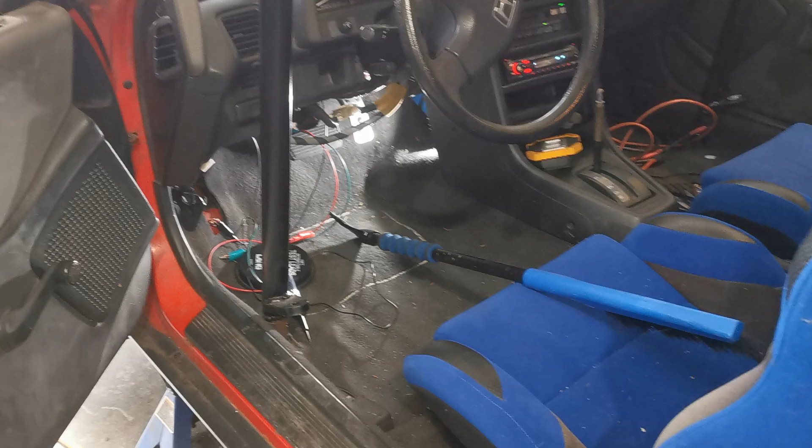I will post a quick video. I'm in the process of getting the Zombieverter VCU to run.

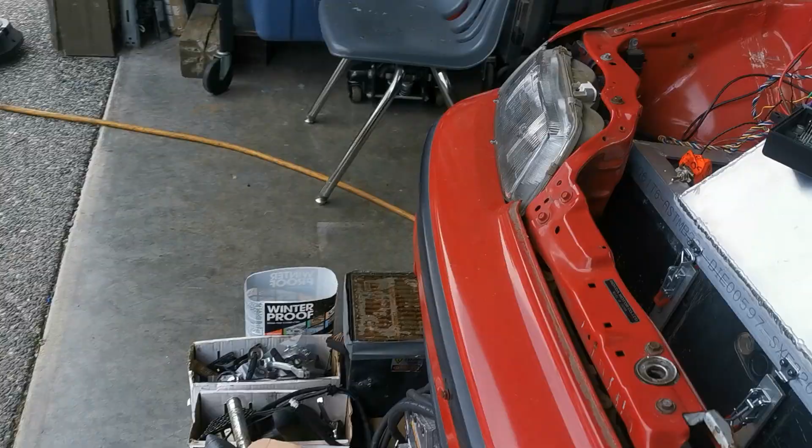Axiom, and yes, I have a big mess of wires. I'm just trying to sort out how everything's gonna work. Oh, I got some heat in there too.

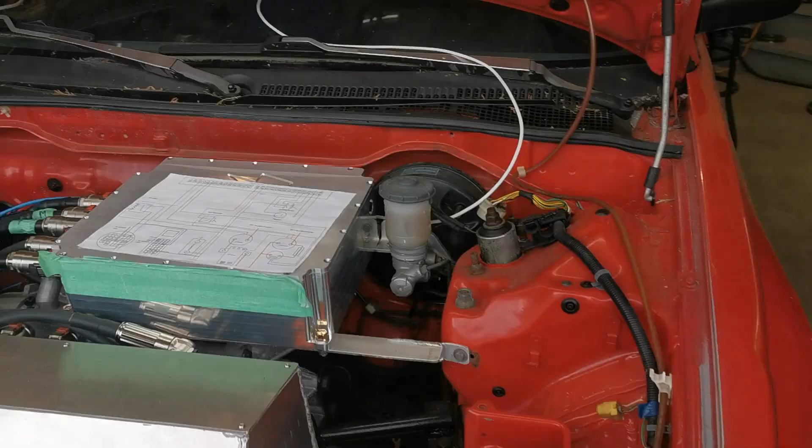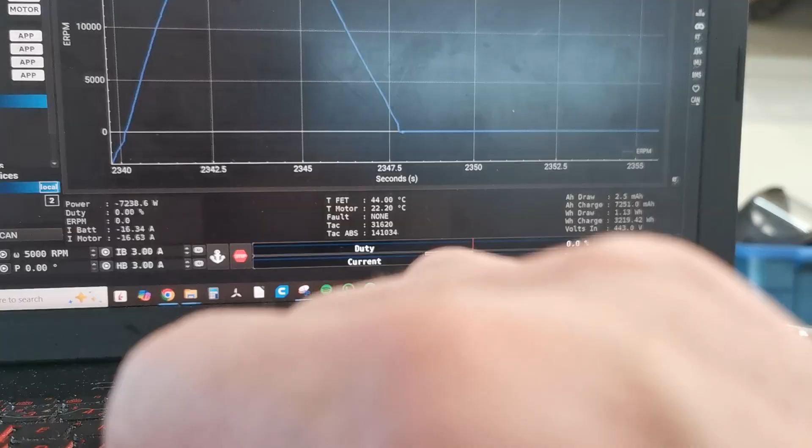I can hear the PWM in Axiom right now. For whatever reason, it wants to try and hold the motor with IGBTs, and I gotta remember what the trick is. There's a setting in VESC, I think, to stop that. If we go here, come on. I can't remember, but there is a setting in here somewhere. I think it helps with that part.

But anyways, I need to figure that out. But anyways, try and get back on track here.

It's just spinning the open diff right now. It's not actually turning the motor. The motor's kind of locked by the Axiom PWM.

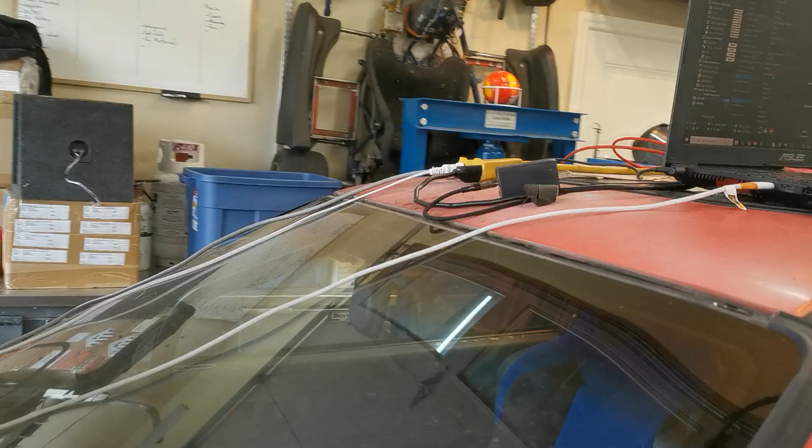So I've got some stuff working. I've got some communication with it. I've made big progress actually this week, and I'm super excited about that. I've got all the way to where I have, there we are, the web interface working, with an experimental version that runs basically VESC controllers to work with Axiom.

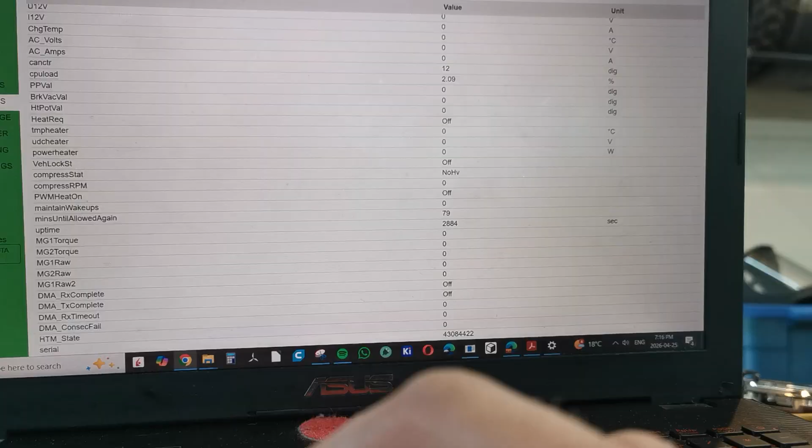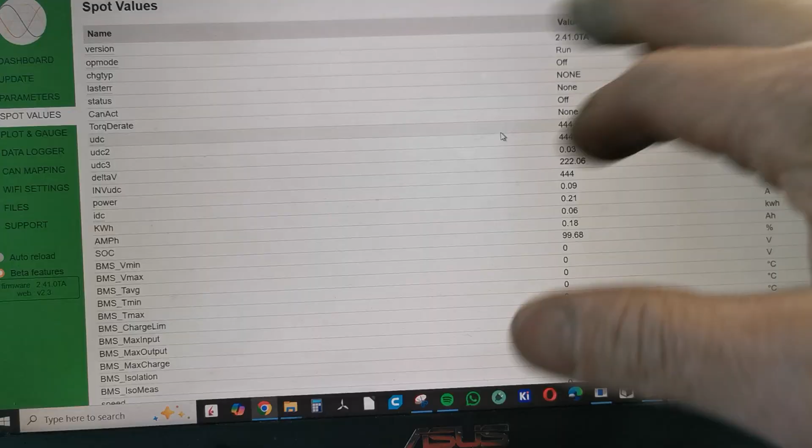I don't have everything set up, but I have a bunch of stuff. I basically have an ISA shunt, Axiom communicating, so it's telling like even the inverter voltage. There's a decent amount of stuff happening, so that's exciting.

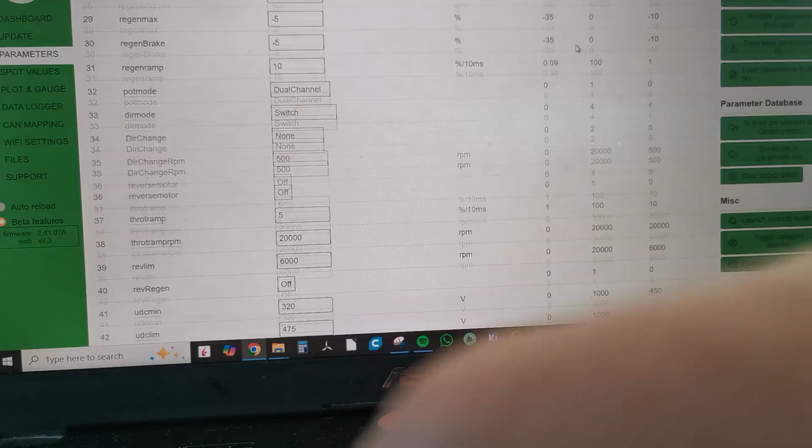There's a lot of parameters we can set in here. It's really good. I've set got pre-charge controlled by the Zombie VCU, doing really good. And I even set up the Wi-Fi to log into my house Wi-Fi. So now I'm actually still logged into Wi-Fi on my computer, but I can access this through the inverter local.

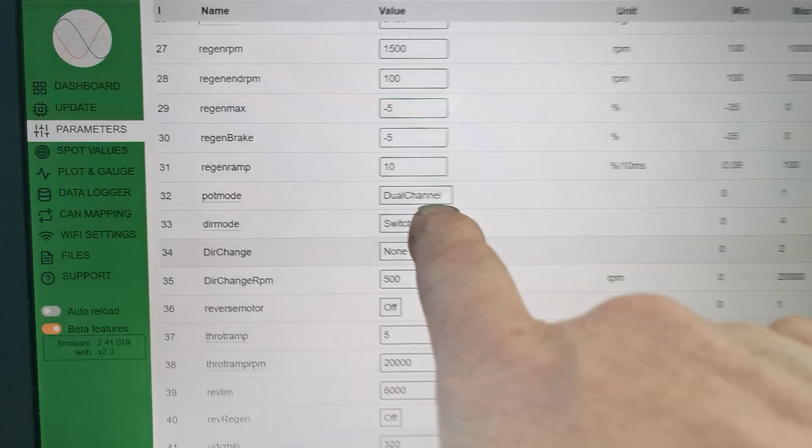Which is pretty handy. I've got the throttle, dual throttle signals. So there's 2 pots in the parameters here. Let's see, pot 1 and pot 2. So basically got dual channel pot mode right there, and pot values, we can look at them. They're usually just over 400 and something digits, so they're both working.

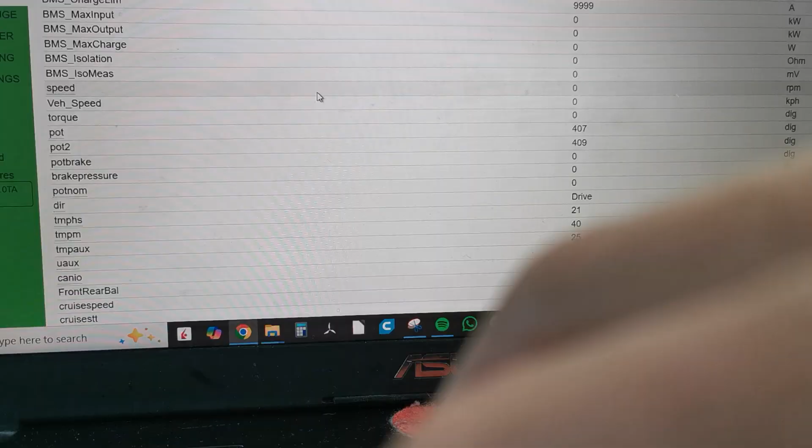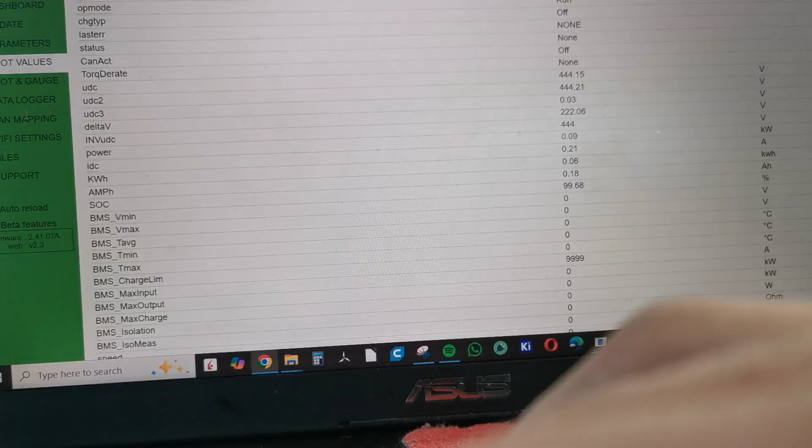Lots of stuff going on, so this is exciting. I'm still sorting some things out. So one of the problems I have right now, and I'm just using a snow brush to try the throttle. I have 2 things going on. So just a little bit of throttle, it turns the wheels, and then if I let go, it revs up.

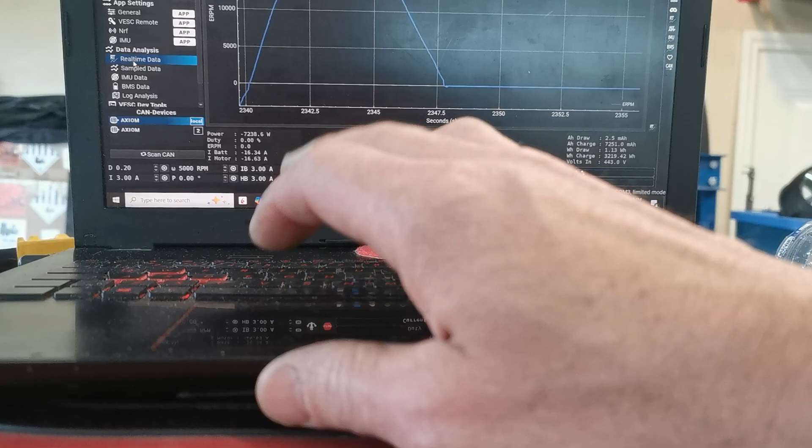On its own in reverse sometimes. But then sometimes it stops and goes forward again. So I don't know what the cause of that is yet, if it's a setting here in Axiom, or if it's a setting in the code or whatever. But it could be a lot of things, so we'll see if we can get that to happening.

And sometimes it goes a bit, so there, I'm not even touching the throttle, it's revving up on its own and forward, and then sometimes it'll stop and go reverse. I'm not touching the throttle, so this is kind of scary stuff. But I have the power turned down, so hopefully it stops eventually. If it doesn't, I'll shut the key off, but I'm trying to avoid that.

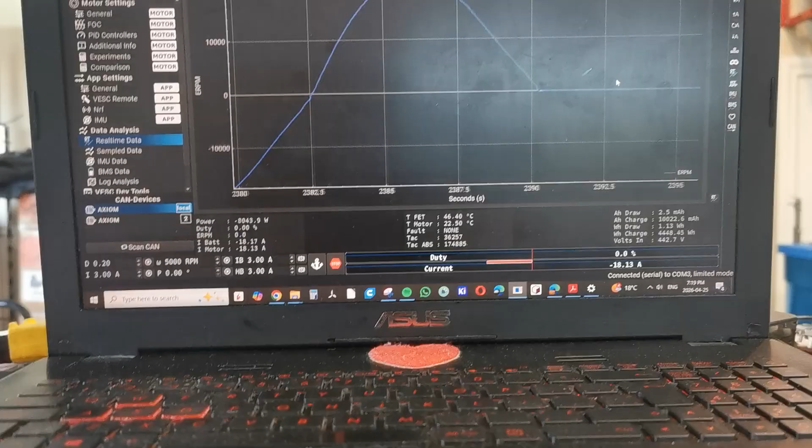Yeah, there, it stopped eventually. So you can see sometimes it does that back and forth. And yeah, like I said, I got the throttle power limit set down quite a bit and everything. It's up on jack stands, make sure there's nothing under the wheels.

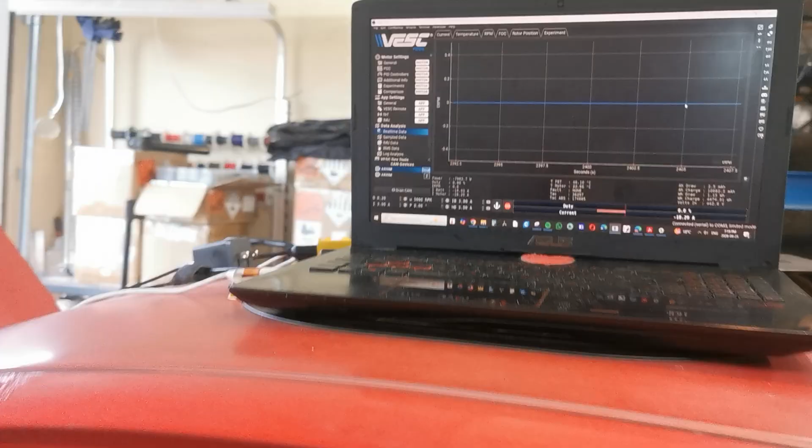I'm also not currently communicating from the front Axiom to the rear, and I got to figure out if I can add that somehow, do CAN forwarding. Actually, that might be something I can look in here, because there is a way to do CAN forwarding. I have to use current control.

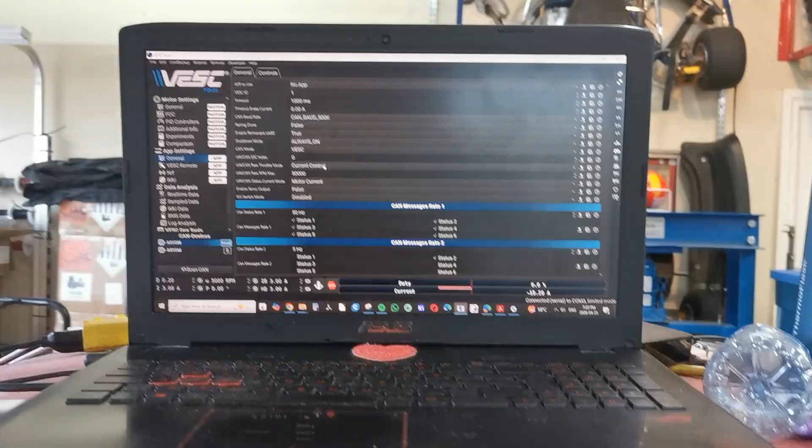I do remember there was a way to CAN forward. You can communicate to the first one over CAN and then it can bounce. I think we've done that before. I'm pretty sure I used another little VESC controller to communicate with one of these.

Anyways, making good progress. Lots of messy wires and things to sort out. Just trying to get some of the basic features working, and then I'll start cleaning up the wiring, make it even better. But it's exciting stuff either way.

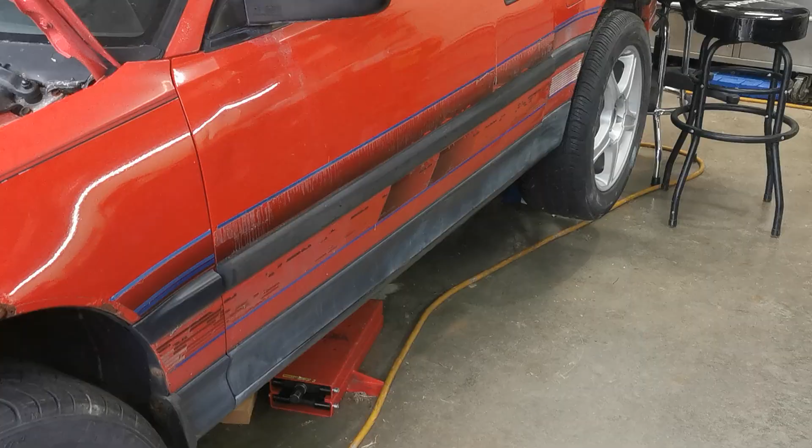Oh, and by the way, I got my racing slicks for the track. And I have rims ordered to go with them, 17-inch rims, 9.5-inch wide on the front, 10.5-inch wide on the rear, 5 spokes. They're going to be pretty sweet. Anyways, stay tuned.